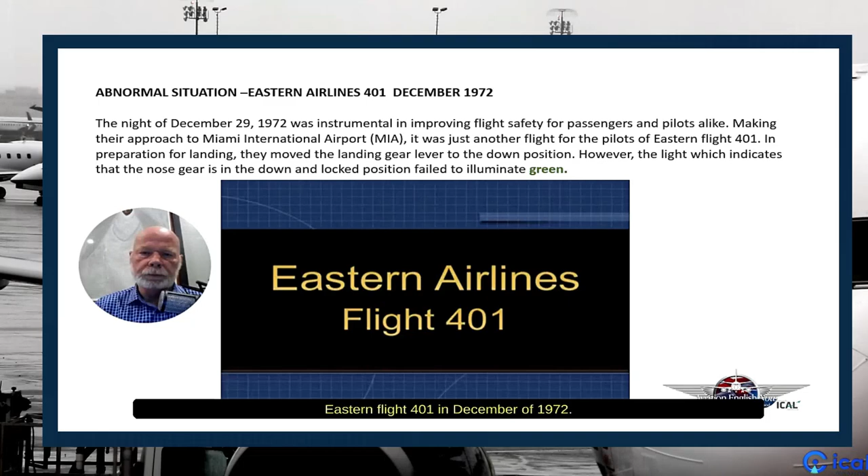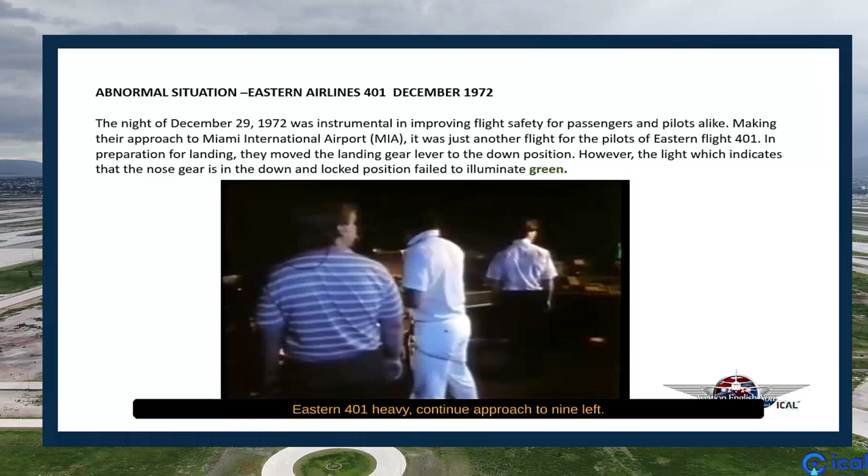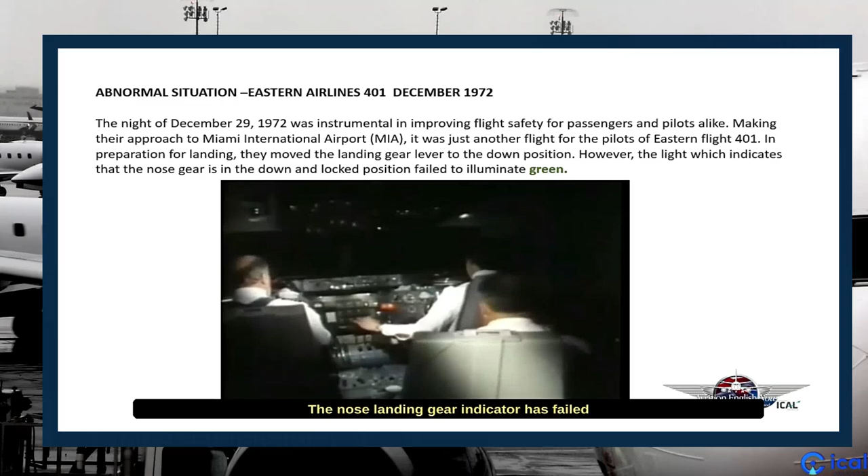Miami Tower, read Eastern 401, just turned on final. Eastern 401 heavy, continue approach to 9 left. Continue approach, roger. Now I'm going to try it down one more time. The nose landing gear indicator has failed to illuminate, so the crew cannot tell whether the gear is extended and locked. You want me to test the lights or not? Yeah, check it. Put your seat back.

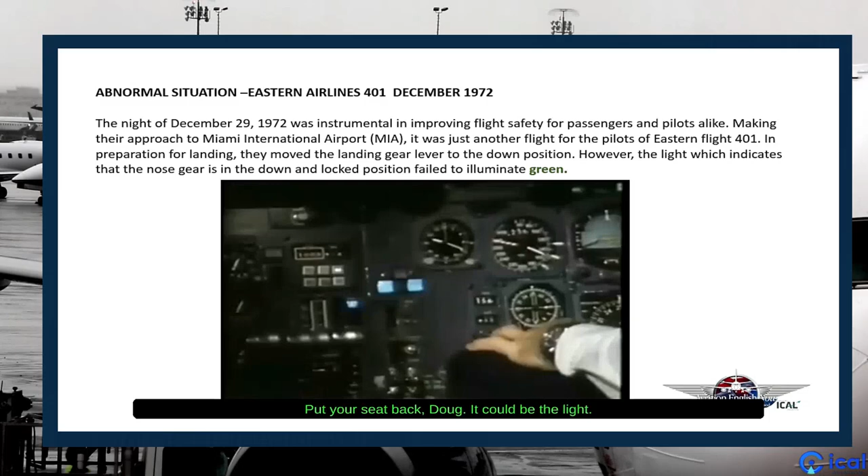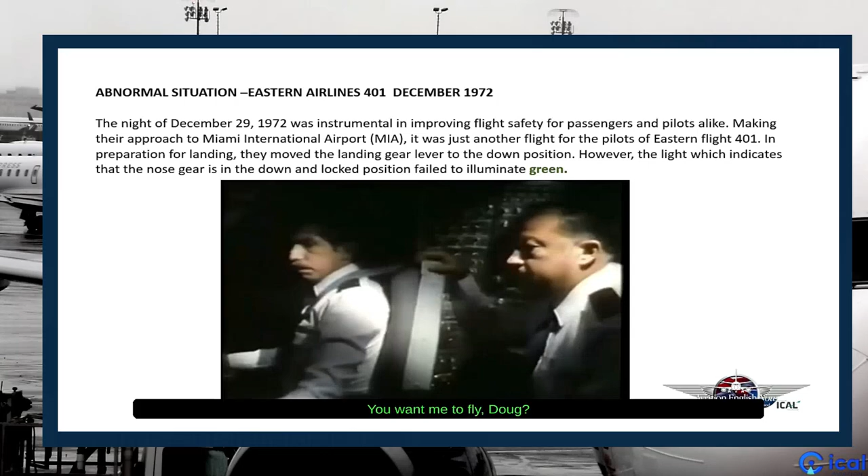Doug, it could be the light. Could you jiggle the light? It's got to come out a little and then snap in. I'll put them on. Up to 2,000. You want me to fly, Doug? What frequency did he want us on?

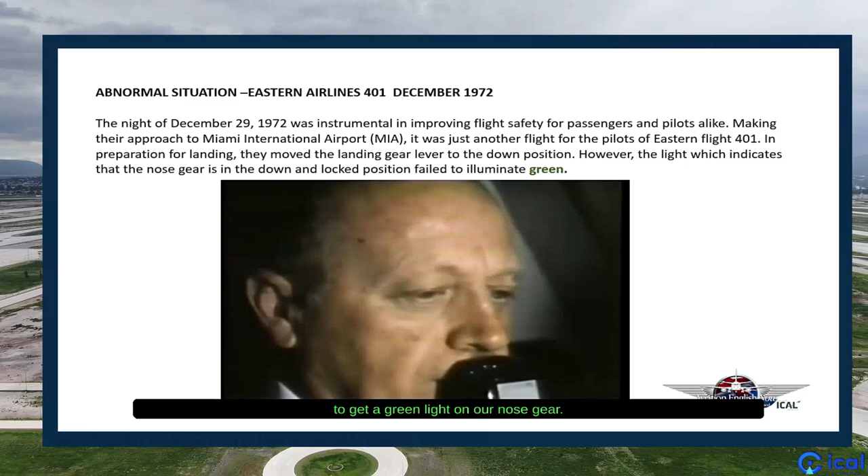28.6, I'll talk to him. All right, approach control Eastern 401. We're right over the airport here and climbing to 2,000 feet. In fact, we've just reached 2,000 feet, and we've got to get the green light on our nose gear. Eastern 401, roger. Turn left heading 360, maintain 2000, vectors to 9 left final.

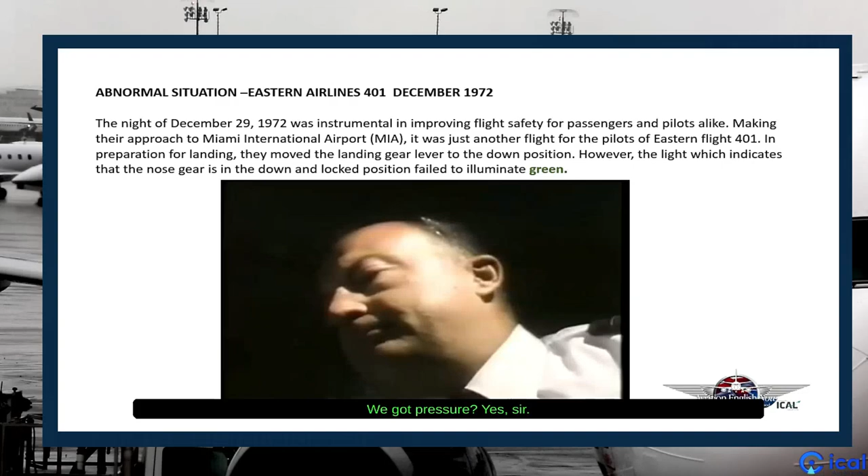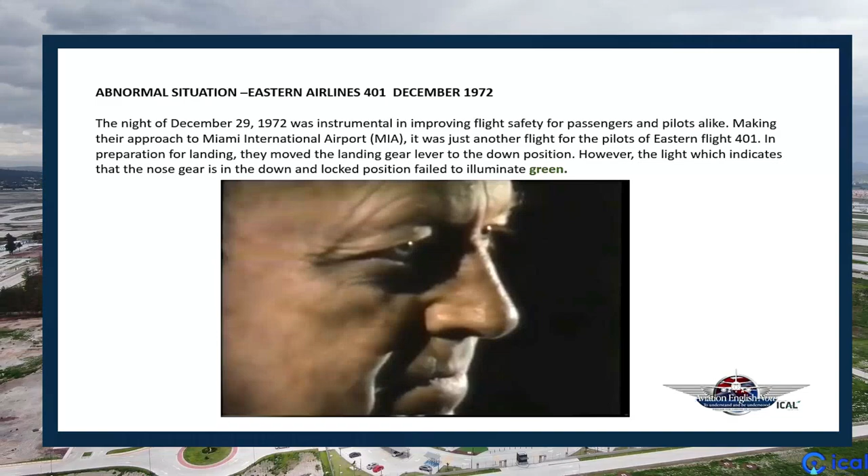Left to 360. I think it's above the red one. Yeah, I can't get it from here. I can't make it pull out either. We got pressure? Yes, sir, all systems. Put the damn thing on autopilot. All right, see if you can put that light out. Well, you got to push the switch just a little bit further forward. Now turn it to the right a little bit. No, I don't think it's going to fit.

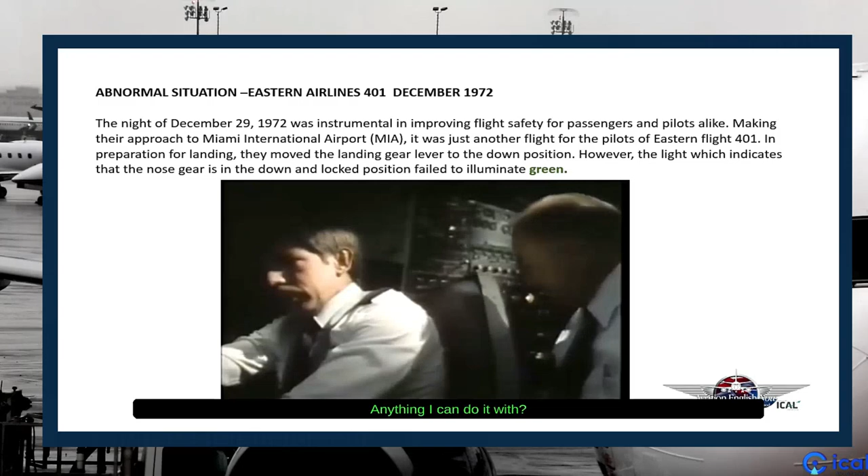Hey, get down there and see if that damn nose wheel's down. Okay, you got a handkerchief or something so I can get a little better grip on this? Anything I can do it with? This damn thing just won't come out, Doug. If I had a pair of pliers, I could cushion it with that.

Everyone is absorbed by the crisis, so they don't hear the audio alert announcing a change in altitude.

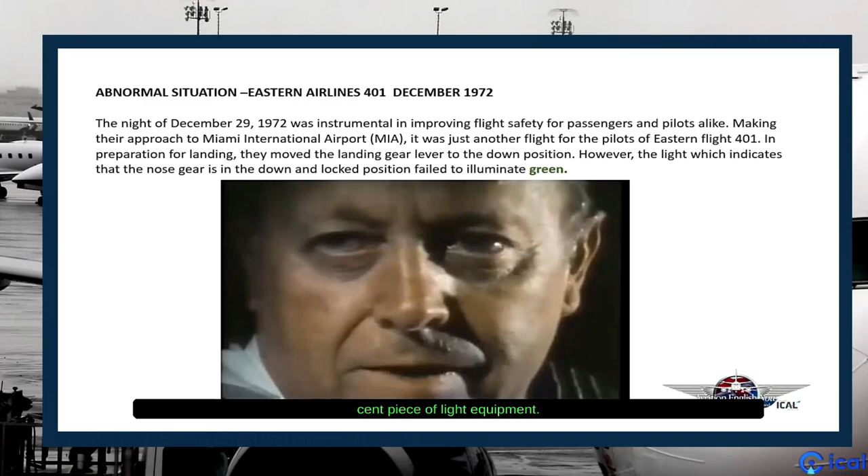I'll give you the pliers. To hell with this. Go down and see if that red line is lined up down there. Don't screw around with that 20-cent piece of light equipment. Eastern 401, I'll go out west just a little further if we can here and see if we can get this light to come on.

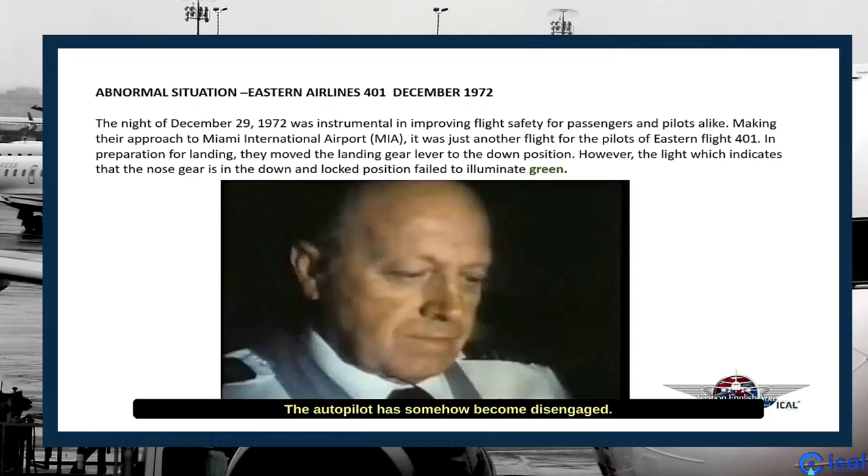All right, the autopilot has somehow become disengaged. The plane is slowly descending, and nobody is paying any attention to the altimeter.

It's always something, we could have made schedule. Well, we can tell if the damn gear is down by looking down at the indices.

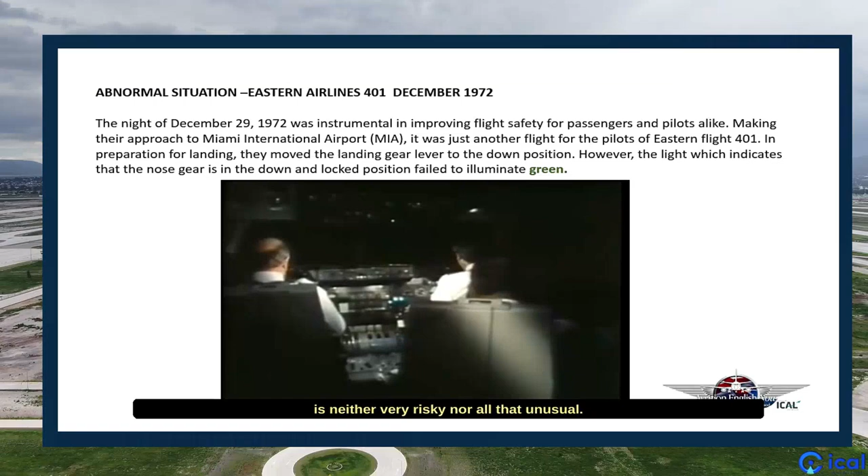An emergency landing with a possible nose gear problem is neither very risky nor all that unusual. It's an option the captain could be preparing for now.

It's got to be a faulty light. Doug, this damn thing just won't come out. All right, just leave it there.

Eastern 401, how are things coming along out there?

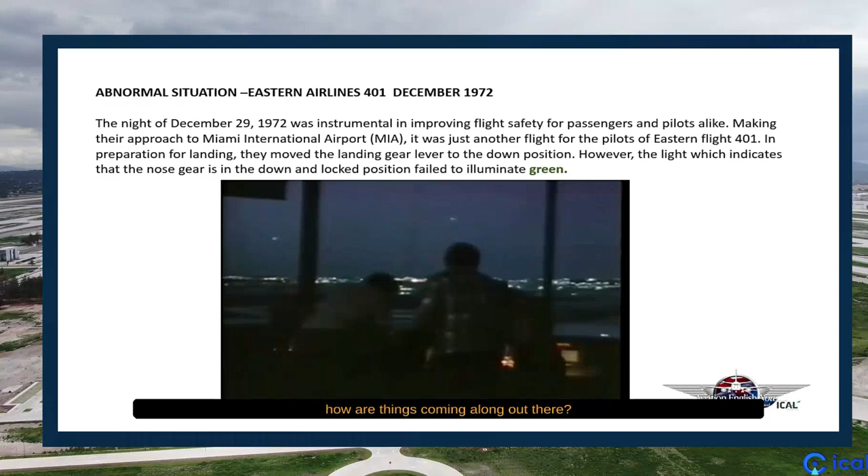The controller's inquiry is too vague for the crew to realize he's asking about 401's surprisingly low altitude.

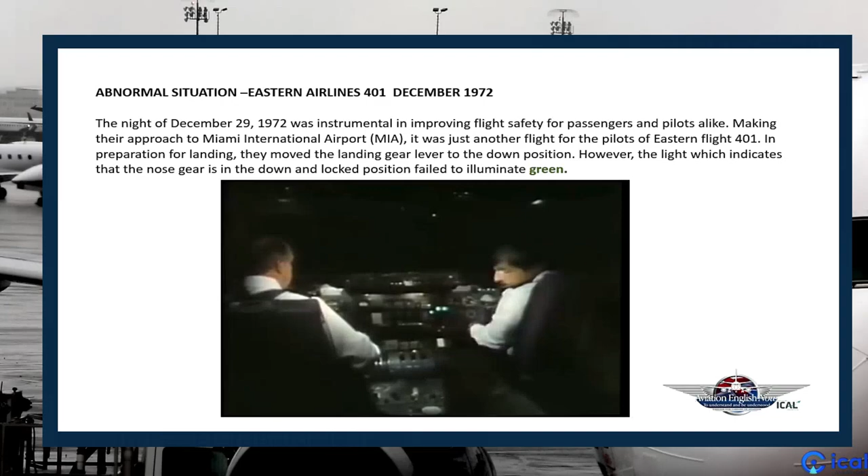Okay, 180. Hey, we did something to the altitude here. What? We're still at 2,000, right? Hey, what's happening here?

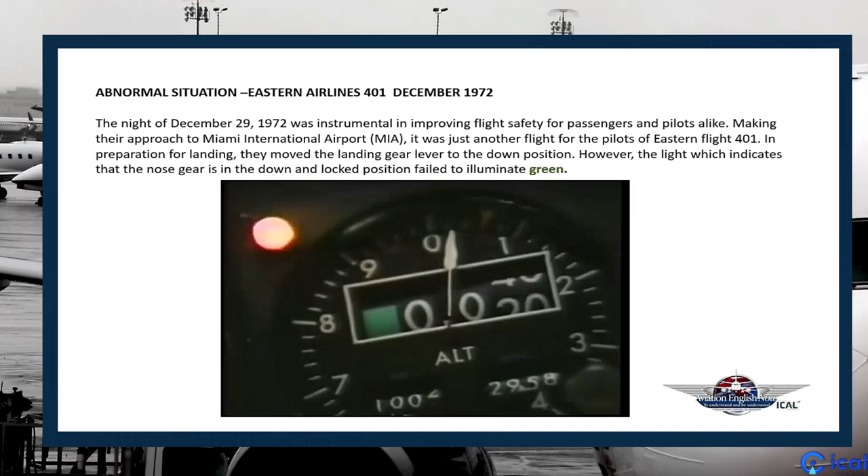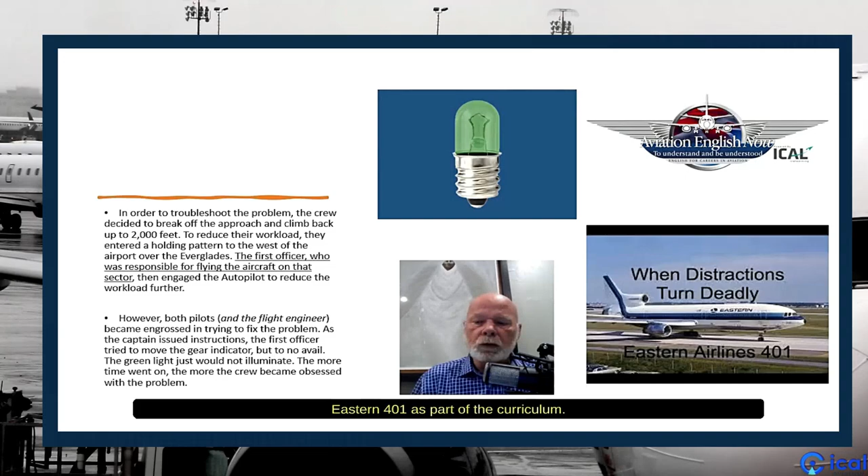I've been fortunate enough to participate in many training courses where Eastern 401 is part of the curriculum. People are in disbelief that the Eastern Flight 401 crash happened. People cannot imagine how the pilots got into this situation where they were not even aware of their altitude.

How did this happen? Most people are shocked, not by a lack of technology, but by the fact that air traffic control wasn't more assertive when alerting the crew of their altitude, and the general fixation on the light in the cockpit.

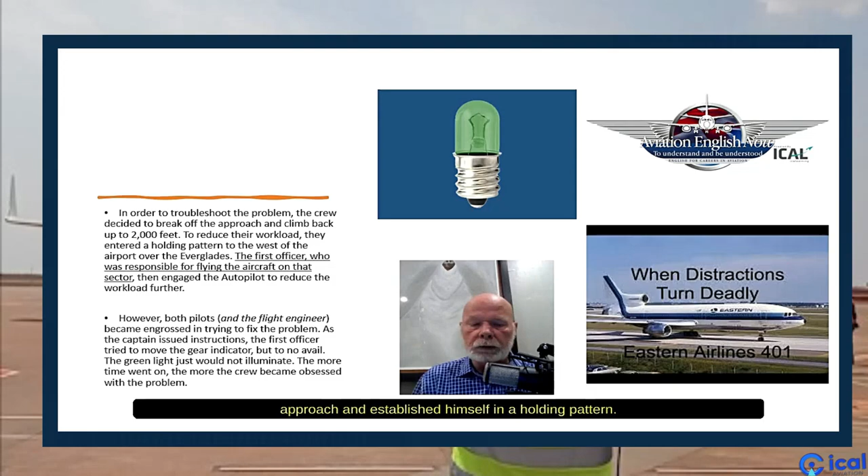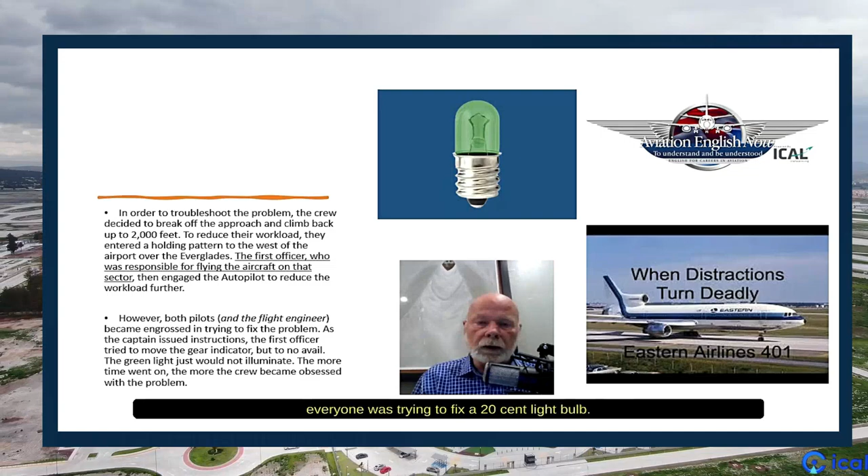There are so many things that went wrong in the 4 minutes after the pilot broke off the approach and established himself in a holding pattern. We're not going to try to get into all of them, but the bottom line is that no one was flying the airplane, and everyone was trying to fix a 20-cent light bulb.

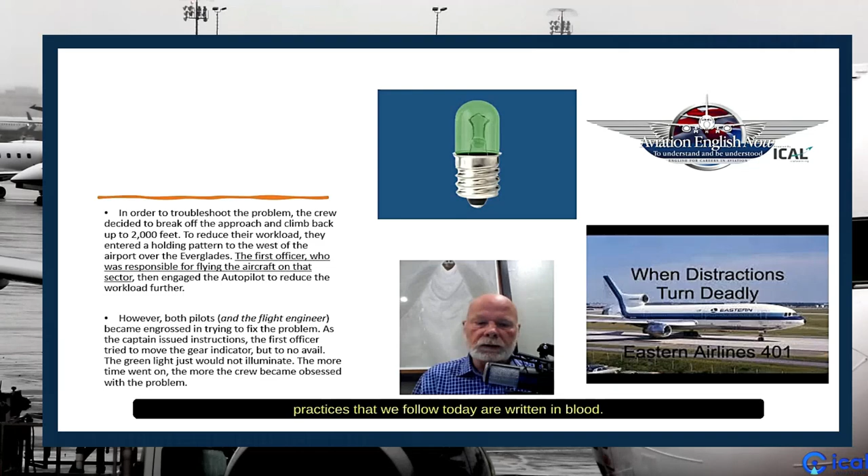There is a saying, and yes, maybe it's a little bit morbid, but the rules, procedures, and best practices that we follow today are written in blood.

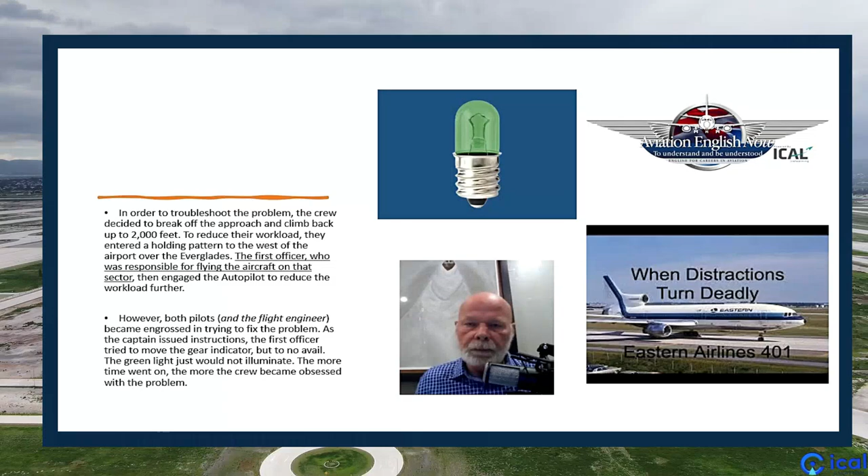Thankfully, that's not always the case, but it's a good thing to keep in mind when you want to cut corners. There were 4 members of the flight deck crew: a pilot, the co-pilot, the engineer or second officer, and a technical officer that was returning from an assignment in New York. The technical officer was riding in the jump seat.

The pilot directed the second officer to go down into the forward cargo area to visually look at the landing gear, while he and the co-pilot continued working to try to get the light to come on in the cockpit. The second officer returned, raised his head from the cargo bay, and said he couldn't see anything in the dark of night. The technical officer went below to try to help him.

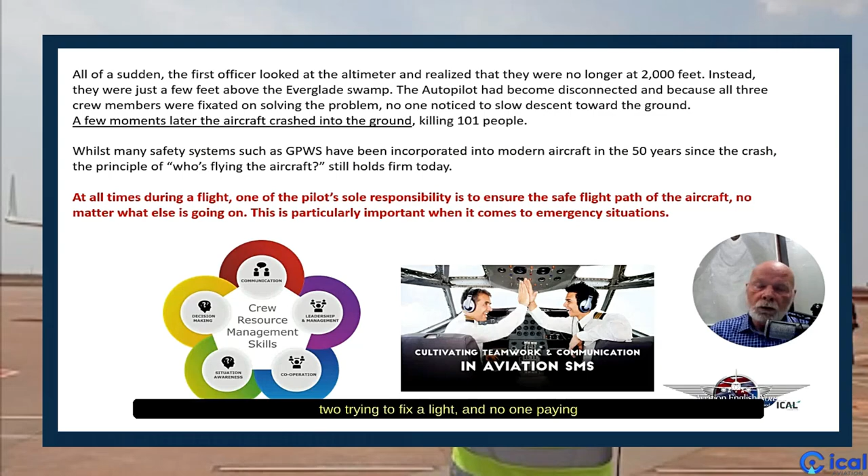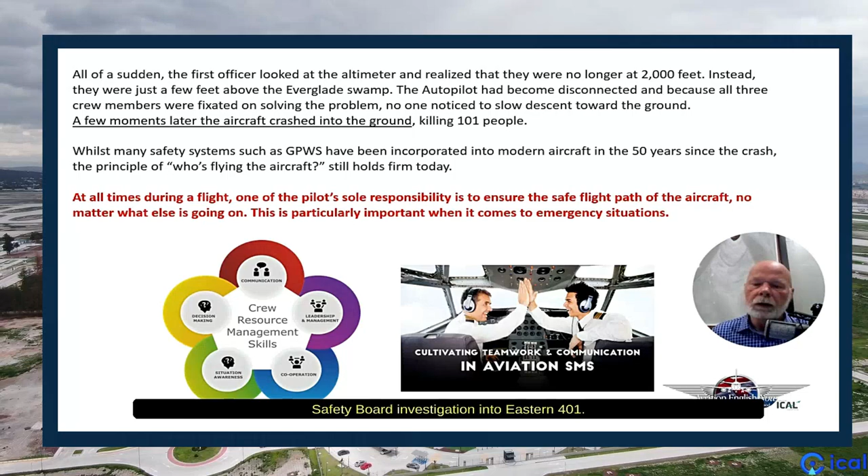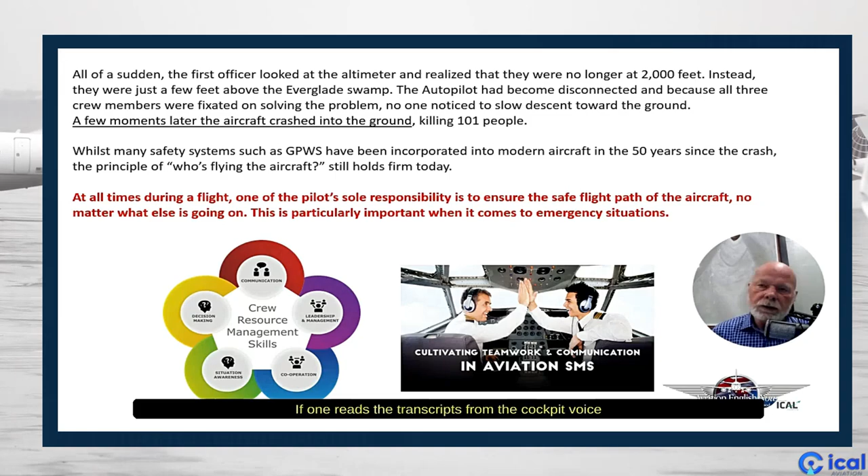If you're interested, look up the National Transportation Safety Board investigation into Eastern 401. It's pretty interesting. Another interesting crash is United 173. It crashed because while the pilots were engrossed in troubleshooting what they thought was a landing gear problem, the aircraft ran out of fuel. If one reads the transcripts from the cockpit voice recorder from the Tenerife crash that killed 583, you will see that there was a tremendous amount of miscommunication and misunderstanding by the crew of the aircraft that mistakenly started to take off without a clearance.

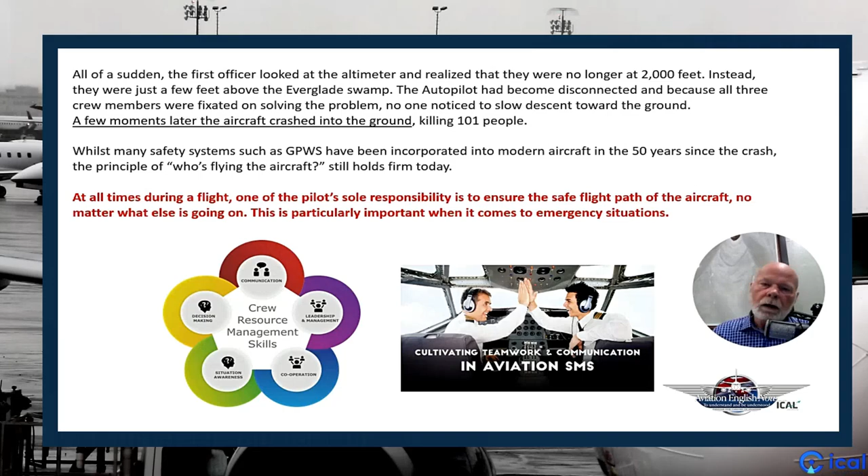But none of the people on the flight deck knew what was going on. A major outcome from these 3 crashes is the creation of Crew Resource Management, or CRM. The advancements in aviation safety have come a long way since the 1950s and are truly mind-blowing.

Think about it. TCAS, low altitude alerts, ground proximity warnings, and double redundancy in critical systems are just a few. To be honest, safety improvements are found in all areas of aviation. For instance, in the cabin, there are lighted walkways, emergency slides that deploy much easier and faster, and the training of flight attendants and crew is constant and ongoing.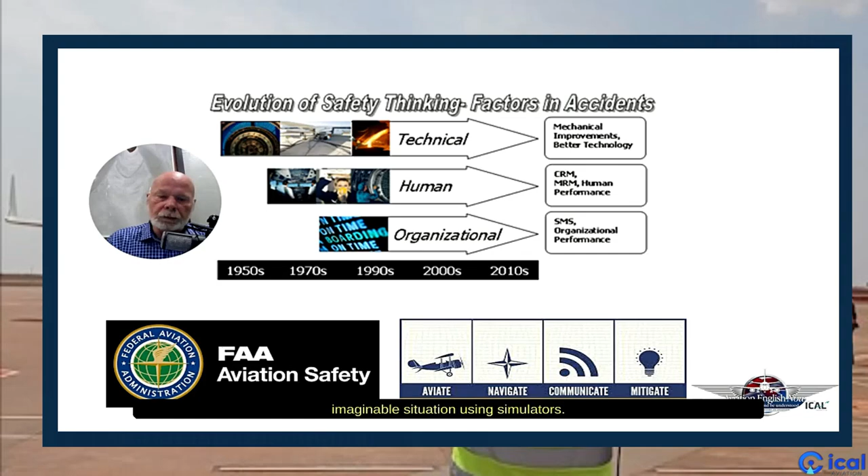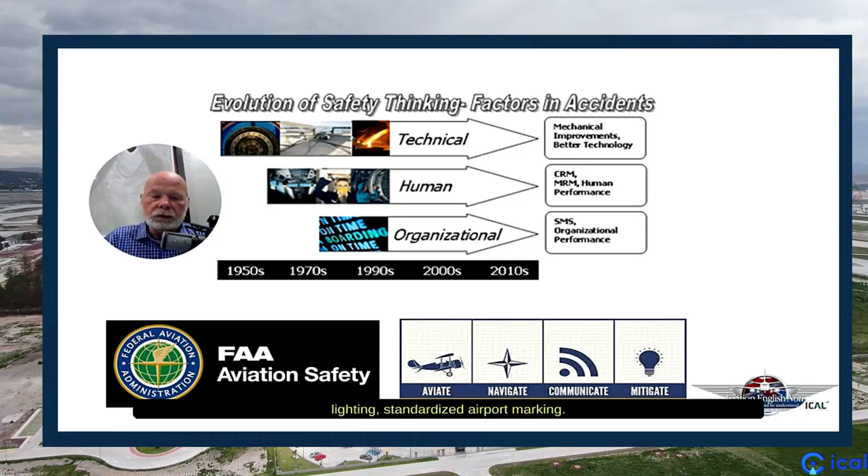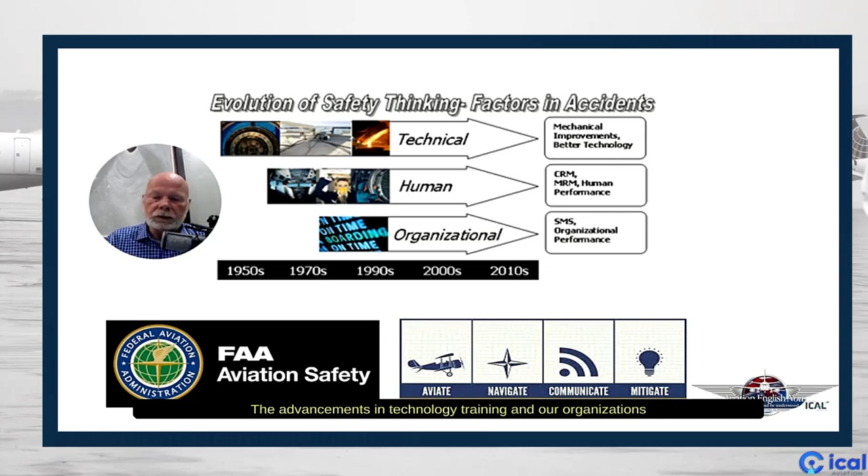Training for all aviation professionals has reached a point that no one would have imagined not too long ago. Pilots train for every imaginable situation using simulators. Air traffic control uses simulators for training and unusual situations. On the airport, surface detection equipment, standardized airport lighting, standardized airport marking. We are all subjected to recurrent training to keep our skills sharp. The advancements in technology, training, and our organizations are keeping us and our customers safer.

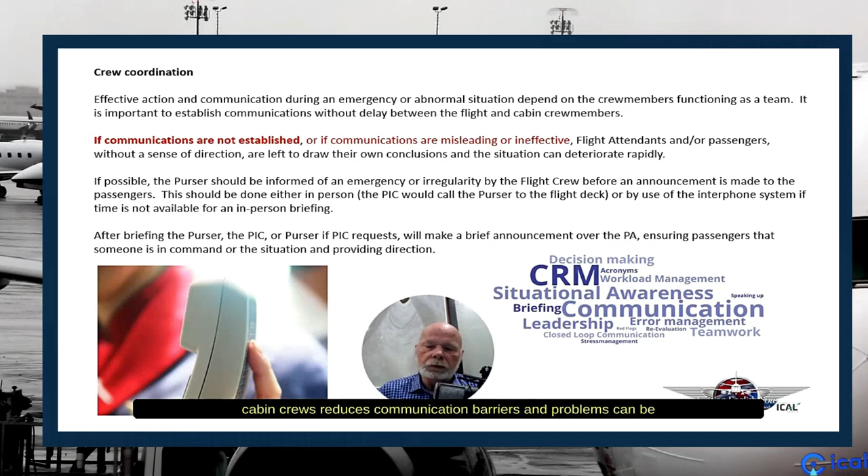Studies have shown that the use of CRM, or Crew Resource Management, by both the flight deck and cabin crews reduces communication barriers and problems can be solved more efficiently, leading to increased safety. CRM training encompasses a wide range of knowledge, skills, and attitudes, including communications, situational awareness, problem solving, decision making, and teamwork.

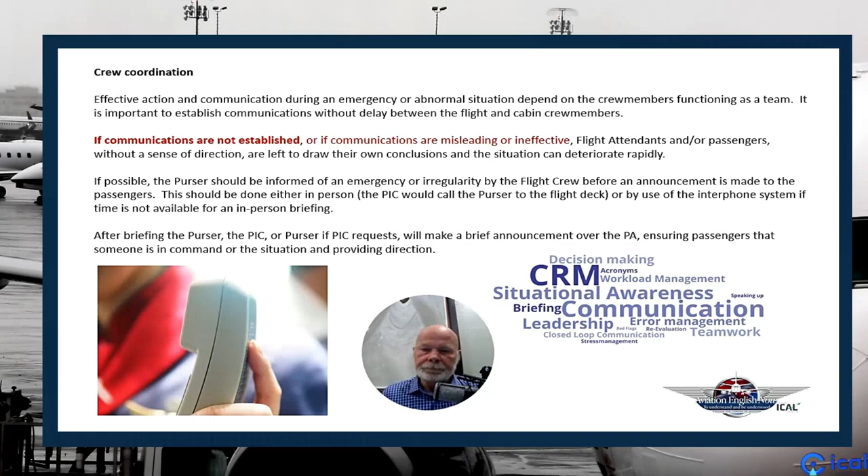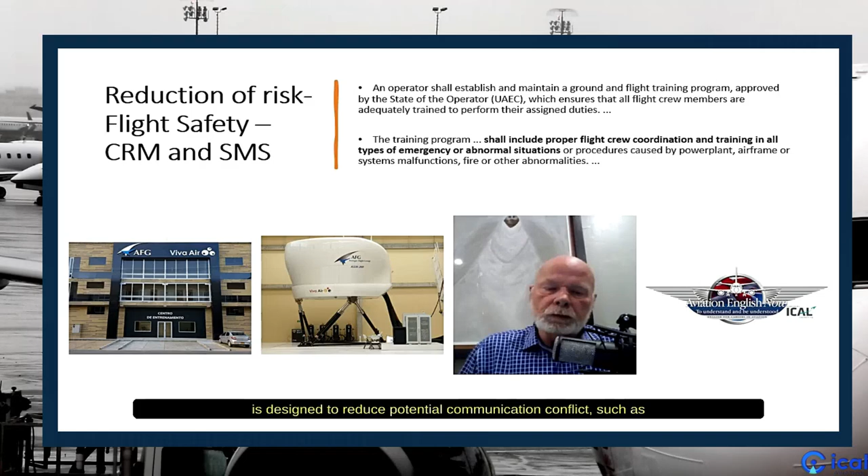CRM can be defined as a system that uses resources to promote safety within the workspace. When we break Crew Resource Management down to its basics, it's a communication and decision-making tool that is designed to reduce potential communication conflict, such as when a co-pilot questions a captain.

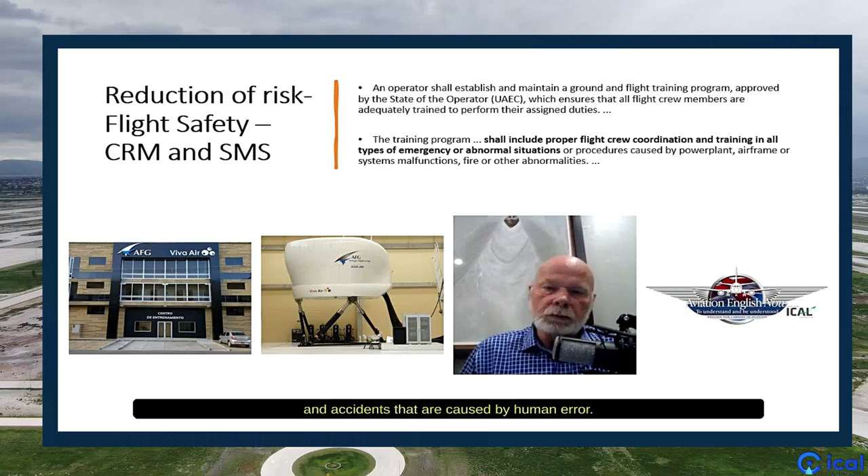By using CRM, we reduce the number of incidents and accidents that are caused by human error. CRM training is concerned not so much with technical knowledge and skills required to fly and operate an aircraft, but rather with the cognitive and interpersonal skills needed to manage a flight within an organized aviation system.

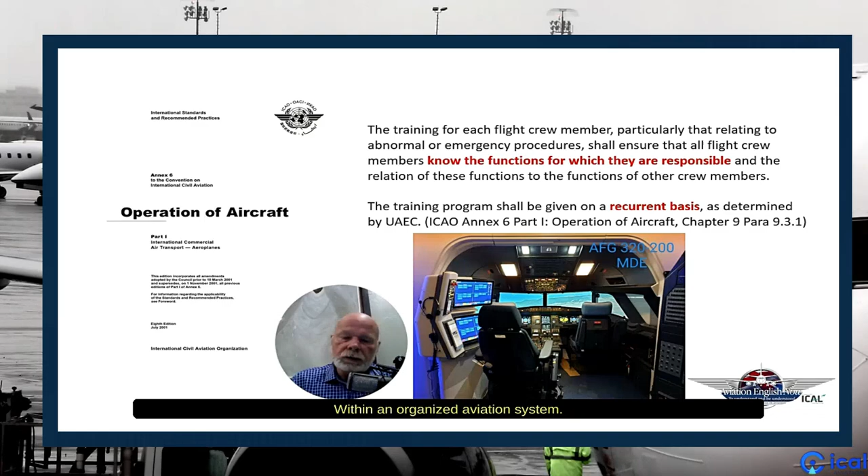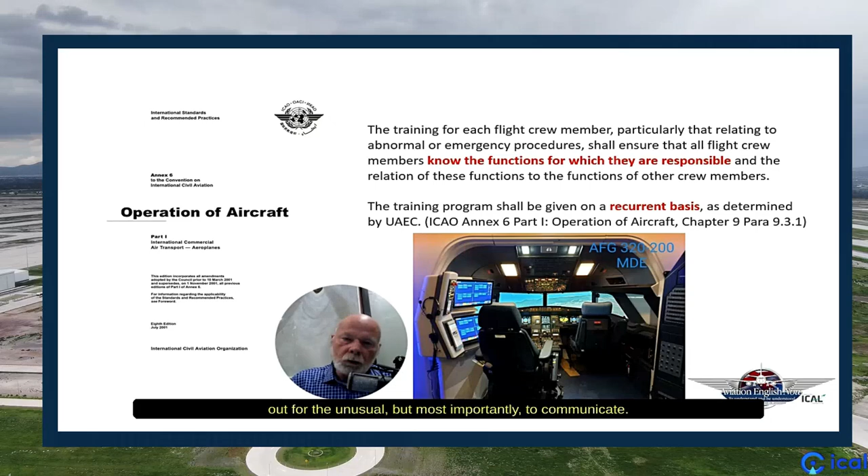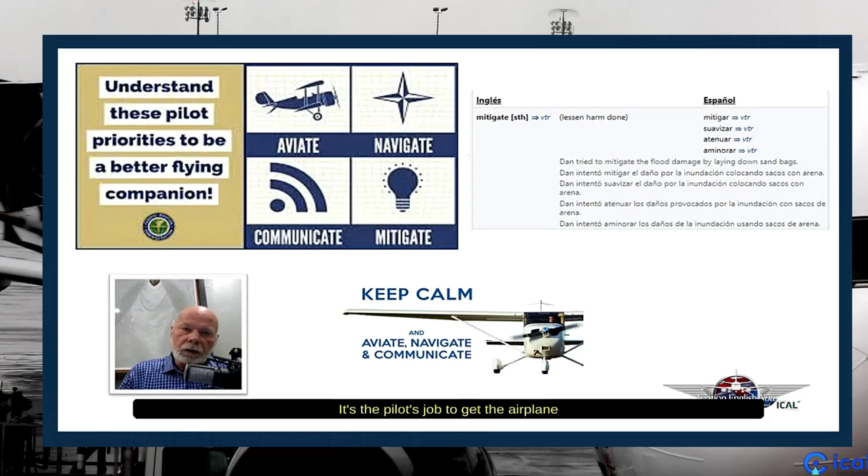Each individual must be trained to do their job, but they are also trained in teamwork, to look out for the unusual, but most importantly, to communicate. Yes, pilots have priorities. While the captain may be able to take a minute to assist with an unruly passenger or to greet a curious child, that's not really their job.

It's the pilot's job to get the airplane from point A to point B safely. For as long as humans continue to rely on machines to fly, we will occasionally have things break. Sometimes something breaks and pilots are able to manage without that system and the flight continues to its planned destination. This is simply an abnormal situation. If it's properly managed, it may cause us to pay extra attention, but no one is in danger.

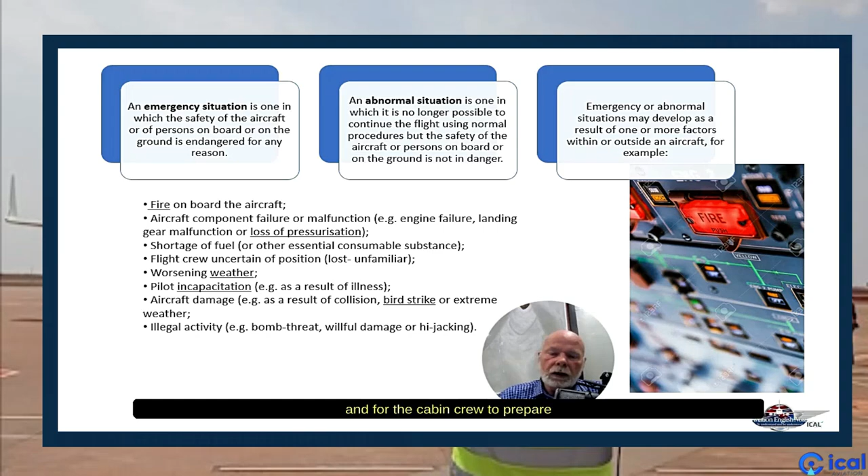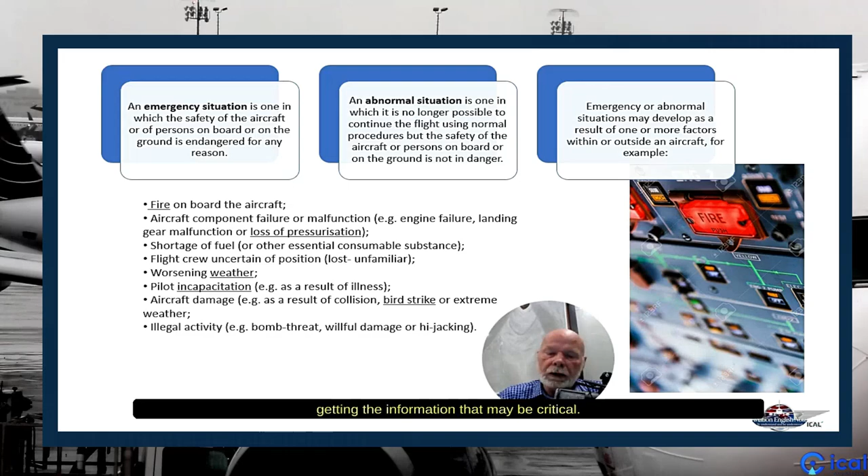Other times, there are more serious factors. They force pilots to declare an emergency and for the cabin crew to prepare the cabin for an emergency landing. This is when our communication skills must be on point. A miscommunication could lead to someone not getting information that may be critical. An emergency landing is pretty routine, but human error and miscommunication can take the routine and turn it into a disaster.

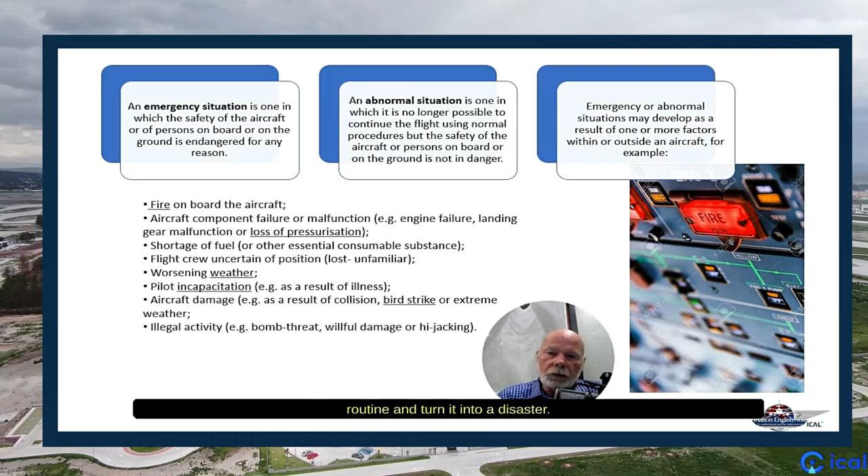Modern aircraft are sturdy. They land every day with conditions that years ago would have resulted in a crash. Abnormal conditions don't threaten the safety of the aircraft if they are addressed, but unaddressed, they tend to escalate.

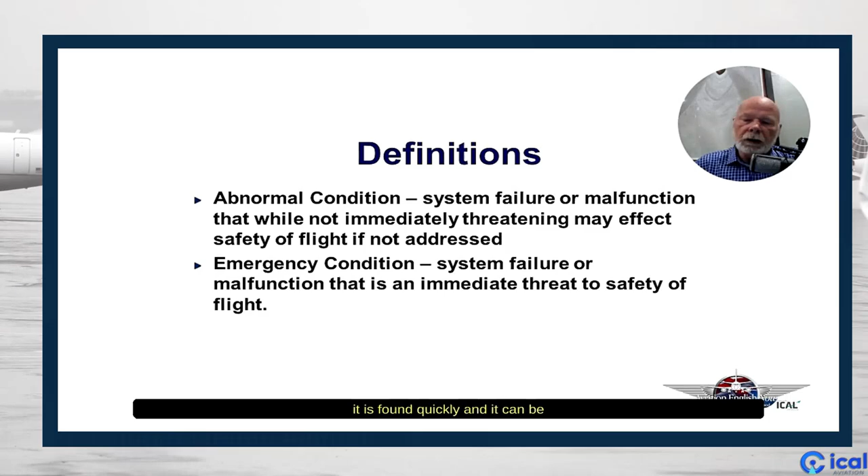A fire on the airplane is a good example. If a fire starts in the washroom, if it is found quickly, and it can be extinguished, no critical systems are impacted. Now we have an abnormal situation. The same fire, left to grow, can quickly become a very serious problem, threatening the safety of everyone on the aircraft.

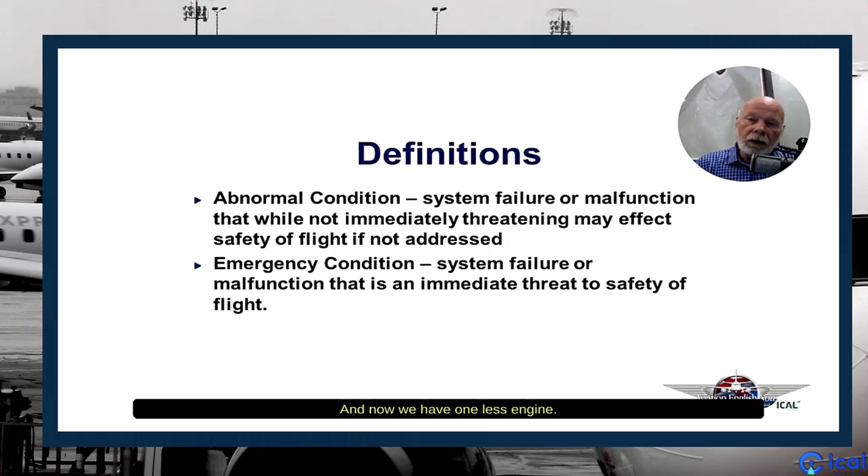An engine fire could quickly be extinguished, but we still have a problem. What went wrong that caused the fire? Is there a potential of it reigniting? And now we have one less engine. By any standard, this is an emergency. Abnormal conditions generally don't require an immediate landing, whereas almost all emergencies do.

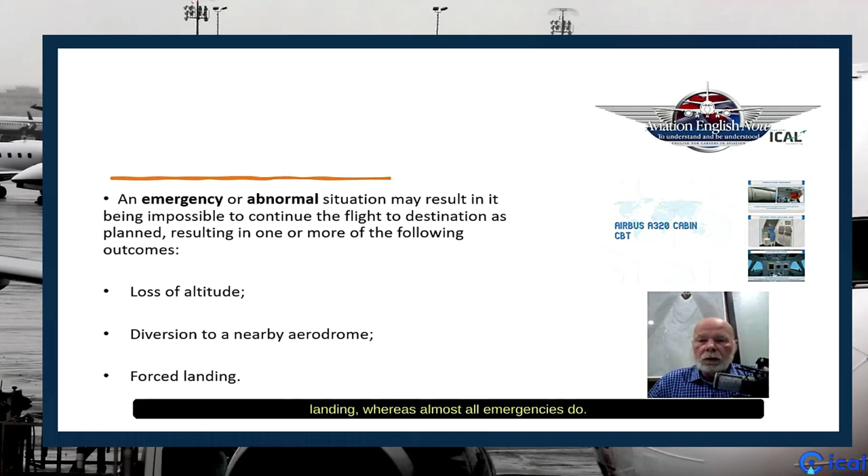Medical emergencies will vary. People in the aviation industry, as a rule, react to stress better than most. Flight dispatch, pilots, and air traffic controllers almost never have days where we're doing the same thing that we did yesterday and nothing unusual happens.

Controllers are taught that we have to remain calm. If we sound nervous or scared, the pilot will hear that, and it leads to an anxiety in the cockpit. Pilots are taught the same thing. A calm mind makes more sound decisions than a panicked one. Plus, as a pilot, you don't want to convey any sense of panic to the cabin crew.

As a pilot, your first job is to fly the aircraft. Beyond that, you have a lot of resources available to help you make sound decisions. The other pilot can assist with flying or communication. The cabin crew can check a wing for obvious abnormalities. Your operations people can be a resource. Occasionally, air traffic control or even other pilots may offer a suggestion.

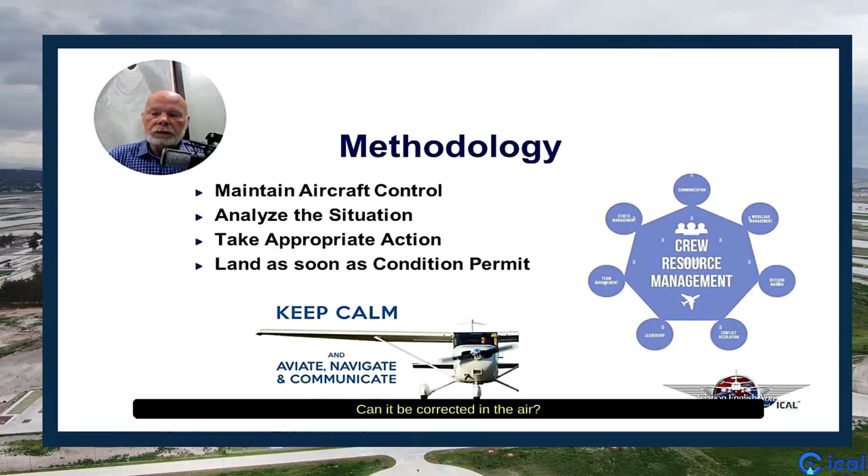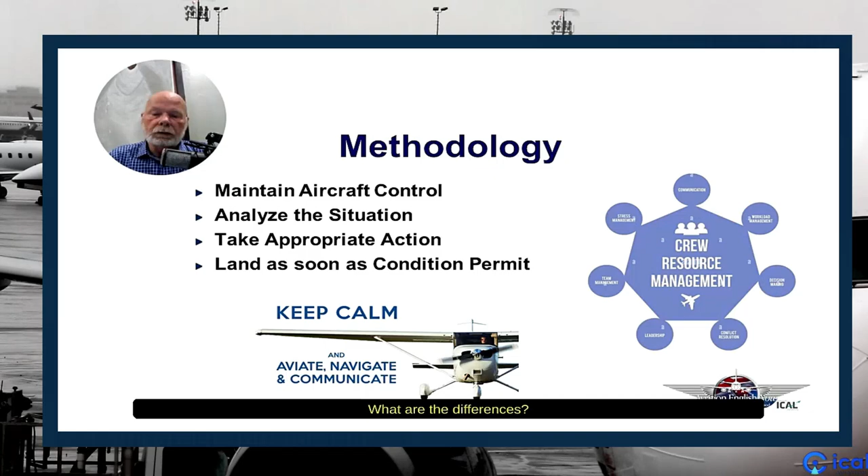When the aircraft is stable, let's figure out exactly what is happening. Is it something obvious? Can it be corrected in the air? Is there a chance that the problem can lead to other problems? Now there are lots of decisions to be made and things to review. Do you need to divert or can you continue? Is holding advantageous? Have you seen this in a simulator? What are the differences? Cabin crew and passenger briefings.

Those decisions and action plans happen almost instantly. Never be afraid to make adjustments based on new information. Now, go land the airplane.

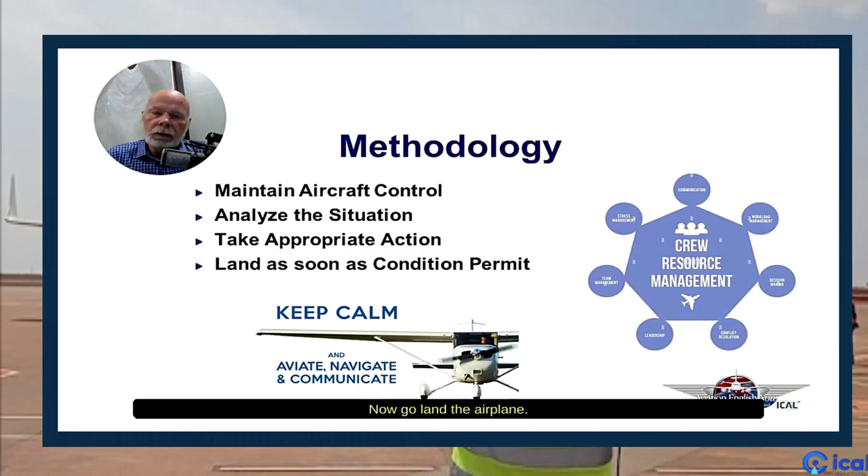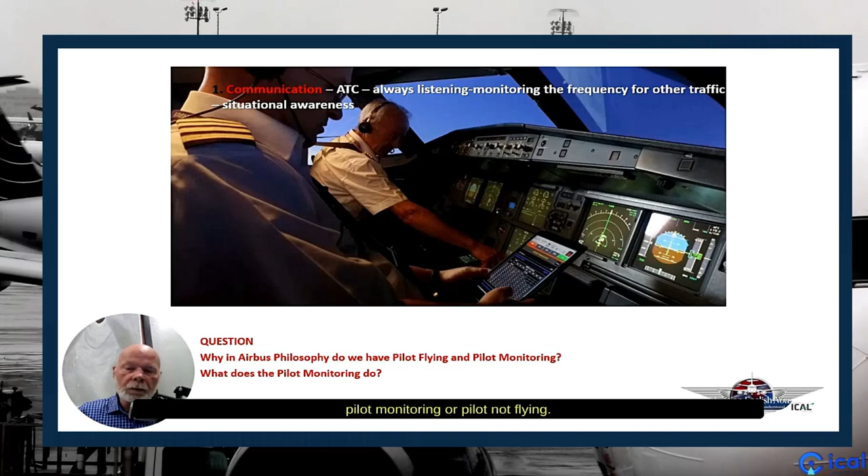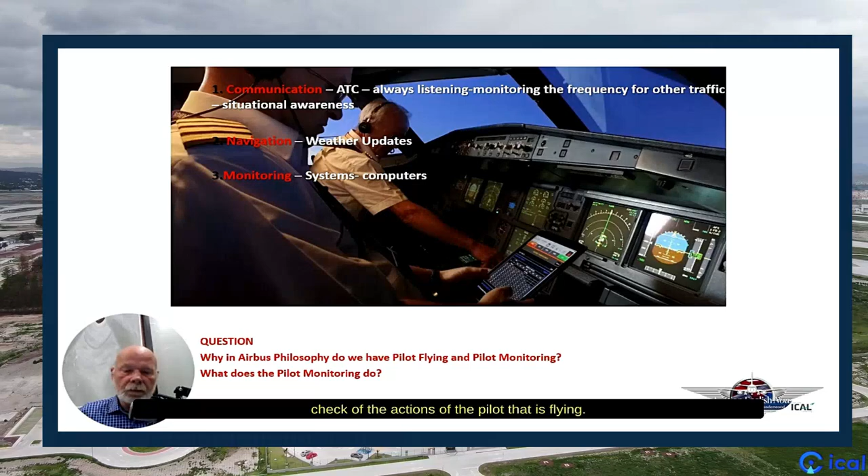Your operations manuals will specify fully the roles for the pilot flying and the pilot monitoring or pilot not flying. But one of the most important aspects of the duties of the pilot monitoring or not flying is the cross-check of the actions of the pilot that is flying. In fact, this part of the role represents one of the most important single reasons why a two-pilot flight crew is specified.